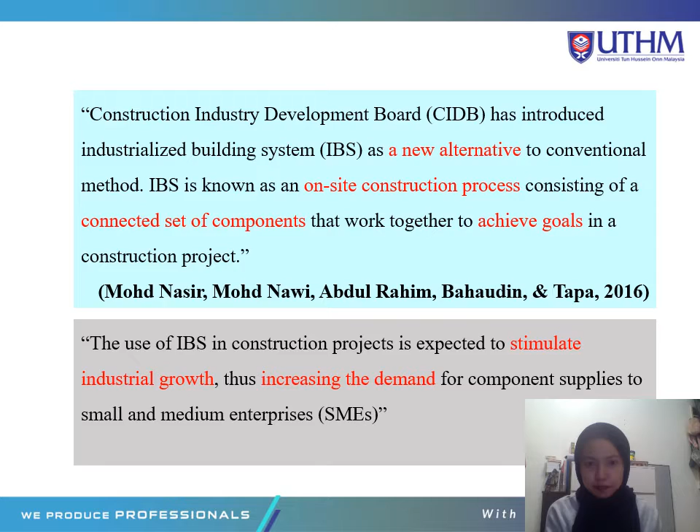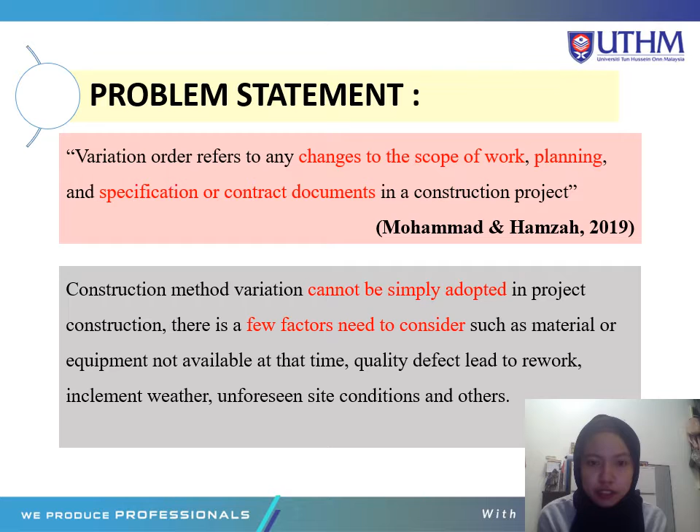For problem statement, variation order refers to any change to the scope of work, planning and specification or contract document in the construction project. Construction method variation cannot be simply adopted. In project construction, there are a few factors to consider, such as material or equipment not available at that time, quality defects leading to rework, inclement weather, unforeseen site conditions, and others. So we need a suitable strategy to avoid delay in project completion and increased project cost. Thus, it is essential to recognize a suitable strategy.

For the objectives of this project, the first one is to identify the implication of construction method variation in the construction phase on project scheduling. The second one is to propose a strategy for construction method variation from conventional to IBS. And the last one is to validate the proposed strategy by simulating the project scheduling using Primavera software.

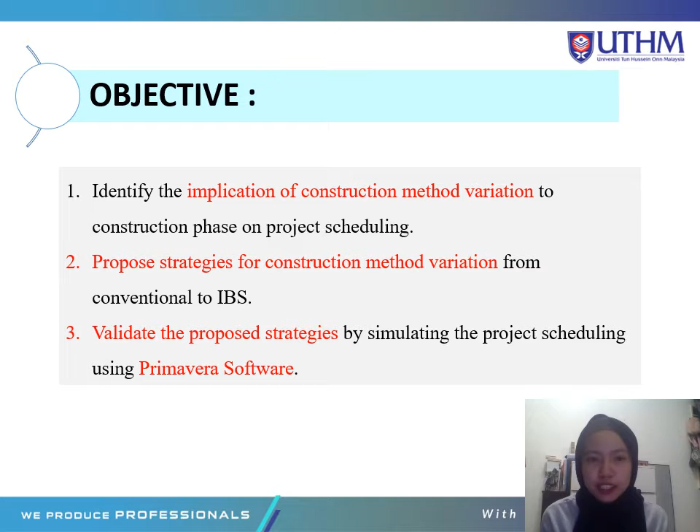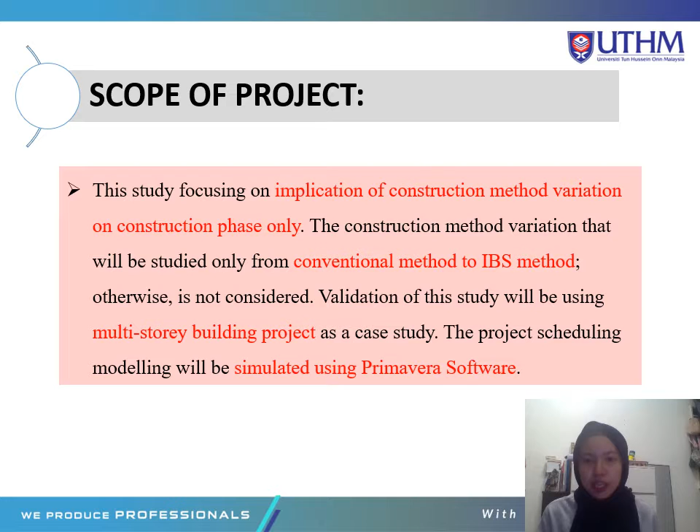The scope of this study is only focusing on the implication of construction method variation on the construction phase only. The construction method variation that will be studied is only from conventional method to IBS method. Otherwise is not considered. Validation of this study will be using a multi-story building project as a case study. The project scheduling modeling will be simulated using Primavera software.

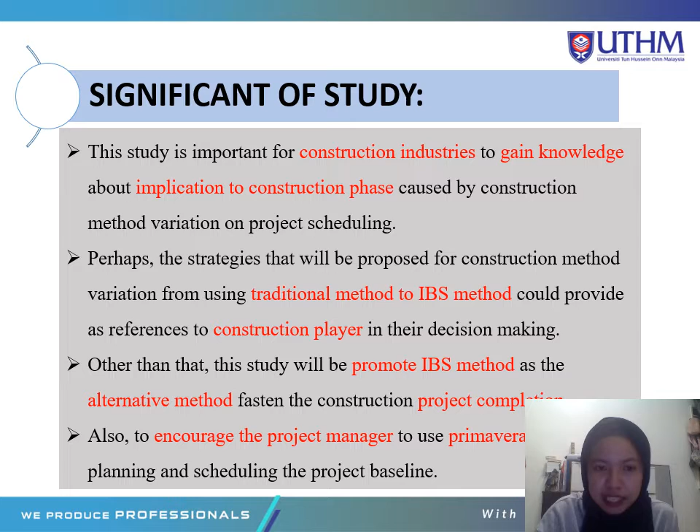This study is important for the construction industry to gain knowledge about the implication to the construction phase caused by construction method variation on project scheduling. Perhaps the strategy that will be proposed for construction method variation from traditional method to IBS method could serve as a reference to construction players in their decision making. Other than that, this study will promote IBS method as the alternative method to fasten construction project completion, and also encourage project managers to use Primavera software in planning and scheduling the project baseline.

For literature review, method of construction. Construction project means different things to different people. It can mean building a house, a high-rise building, a dam, an industrial plant, an airport, or even remodeling or upgrading a facility. There are many types of construction method for construction projects. Each method applies different types of main material and activities. It is also closely related to the amount of waste generated. Each method has its advantages and disadvantages, such as speed, duration of work, construction work, and cost.

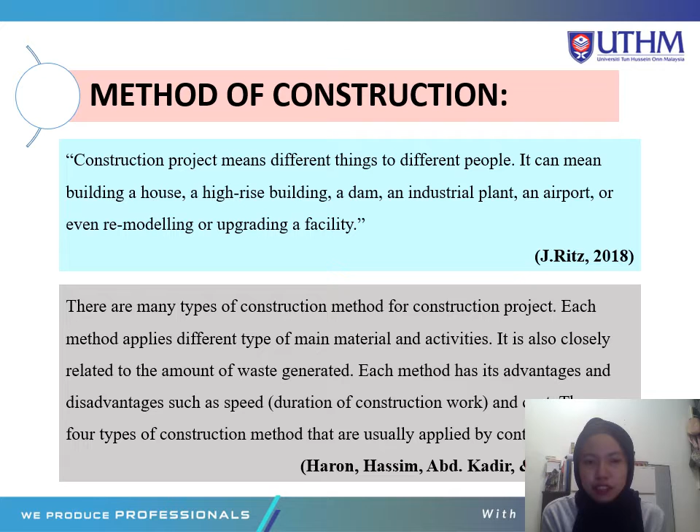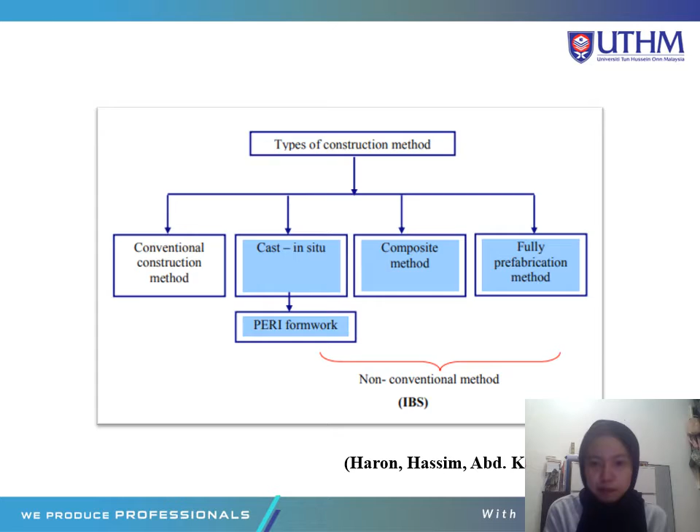There are types of construction method that are usually applied by contractors, such as conventional construction method, cast in situ composite method, and fully prefabricated method. Cast in situ composite method and fully prefabricated method are classified as non-conventional methods, and all types of IBS are categorized under one of these methods. Conventional method in construction projects is defined as a system of current practice, usually using in situ concreting with temporary wooden formwork.

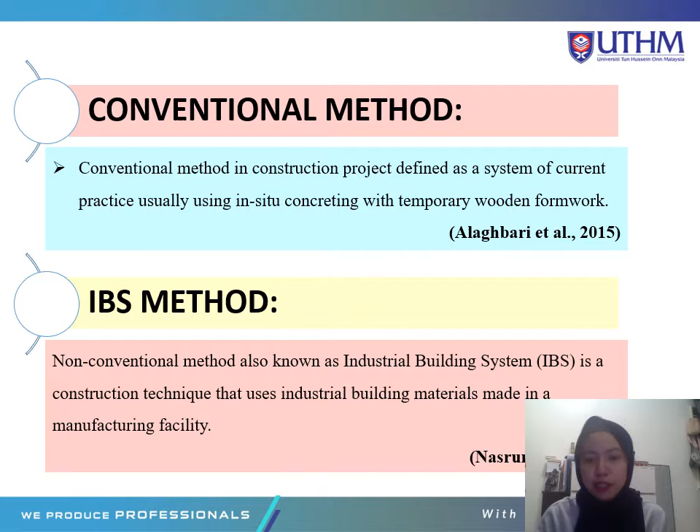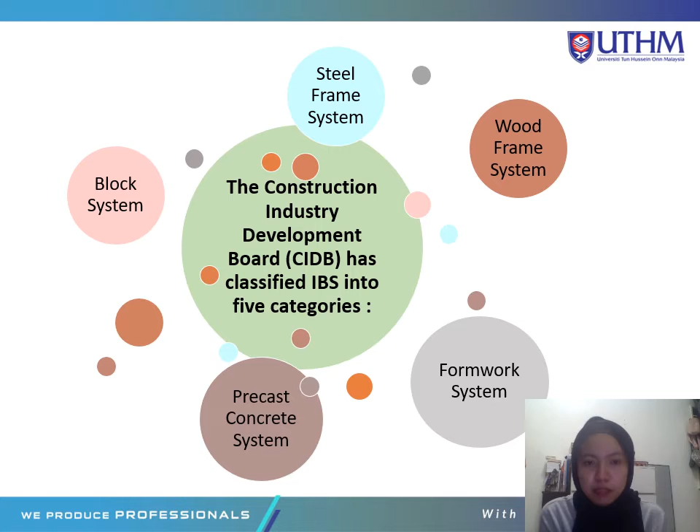Non-conventional method, also known as IBS, is a construction technique that uses industrial building materials made in manufacturing facilities. CIDB has listed 5 categories of IBS, which are steel frame system, wood frame system, formwork system, precast concrete system, and block system. Advantages of IBS are cost saving, social benefit, quality control of products, delivery time, safety, and cleanliness of work site.

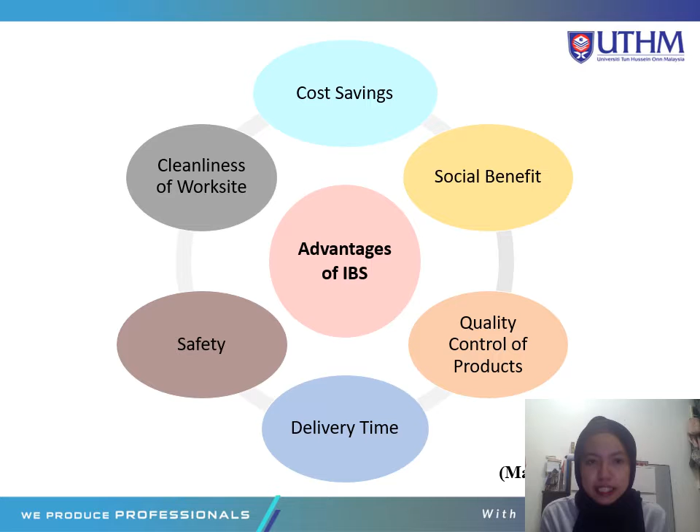Time overrun. Delay is a situation when the contractor, consultant, and client jointly or severally contributed to the non-completion of the project within the original, stipulated or agreed contract. This is a group of factors causing time overrun, which are transportation, contractor, consultant, owner, project, design, material, equipment, labor, and external factors.

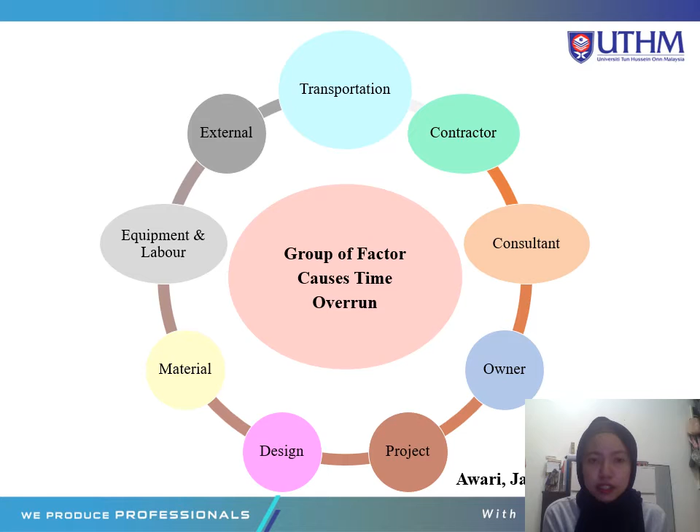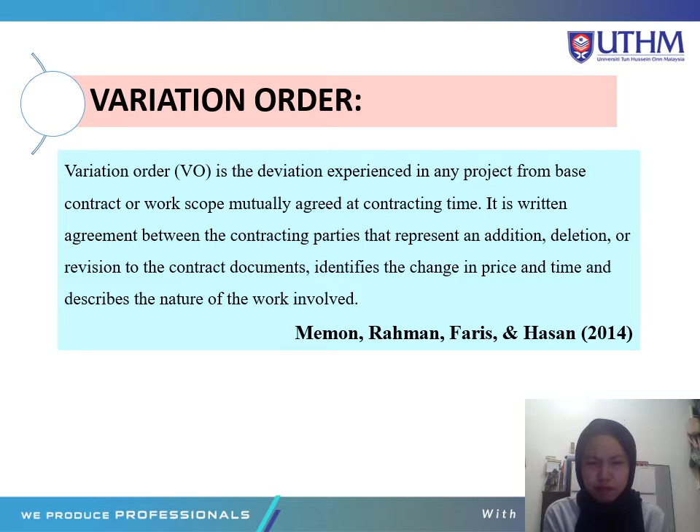Variation order. Variation order is the deviation experienced in any project from the base contract or work scope mutually agreed at contracting time. It is a written agreement between the contracting parties that represents an addition, deletion, or revision to the contract document. It identifies the change in price and time and describes the nature of the work involved. This is several causes of variation orders.

Causes of variation orders include: change of schedule, change in design by the consultant, unavailability of equipment, change in scope, conflict among contract documents, shortage of skilled manpower, lack of strategic planning, owner financial problem, design complexity, contractor financial difficulties, inadequate design, obstinate nature, inadequate working drawing details, poor workmanship, change in specification by the owner or consultant, poor procurement process, and impediment to prompt decision-making process.

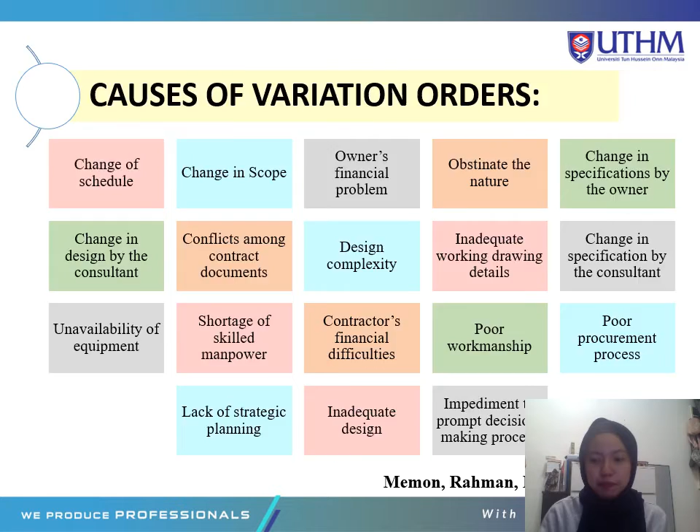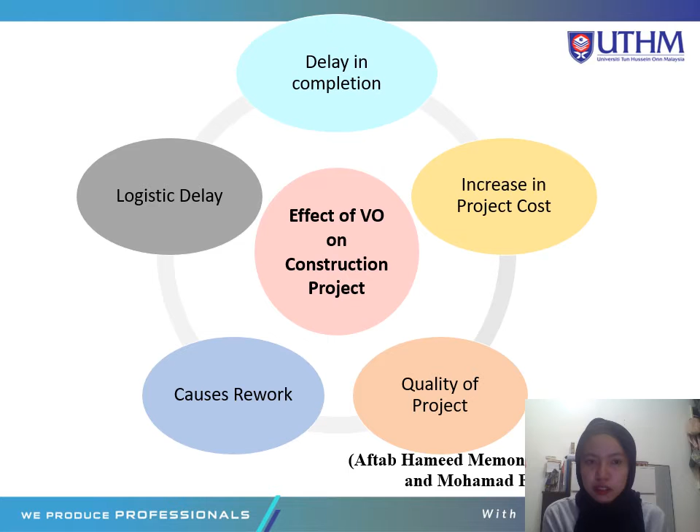This is the effect of variation order on construction projects, which leads to a delay in completion, increase in project costs, quality of project issues, causes rework, and logistic delay.

Before planning of the project, we have a clear objective, risk assessment, milestone, resource allocation, and task dependencies. Monitoring and control can be done for the timely completion of a construction project.

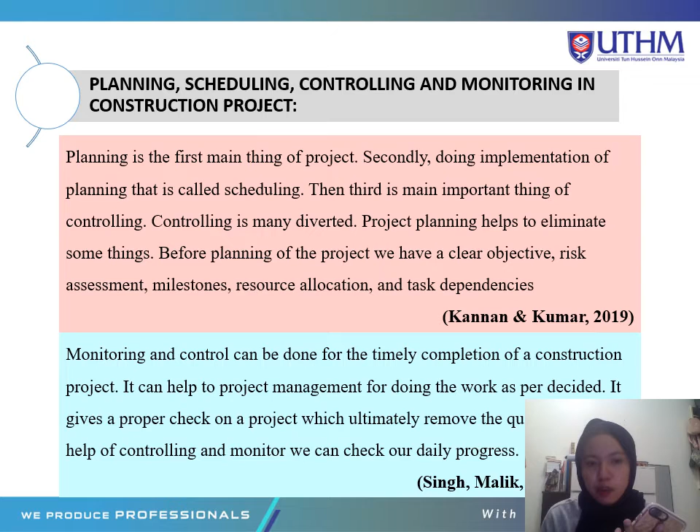It can help project management to do the work as per decided. It gives a proper check on a project which ultimately removes the queries. With the help of controlling and monitoring, we can check our daily progress.

Primavera software. Primavera software can function as a planning, scheduling, budget, and resource management software that enables organizations to make informed decisions and improve their ability to deliver project on time and under allocated budget.

It also helps to manage the IT process, determine the estimated completion of telecommunication projects, risk analysis in aerospace engineering, and enables precise control in the manufacturing process. As a result, the scope of Primavera is an ever-changing, ever-growing tool for simplifying the completion of all project-oriented tasks and activities.

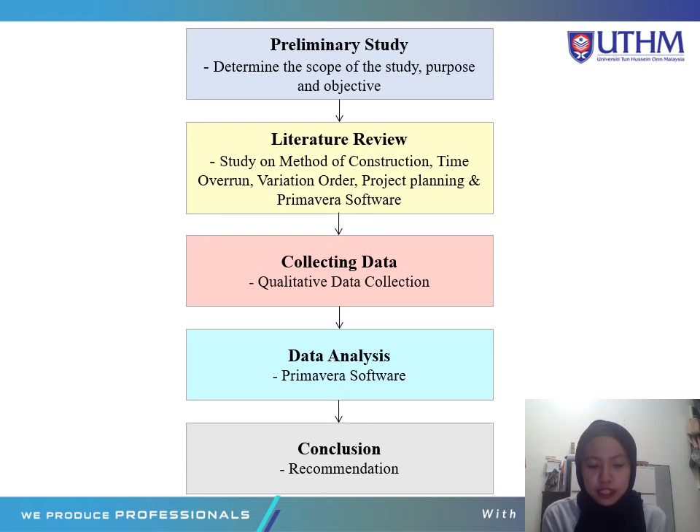Furthermore, the literature review and the research methodology are completed to facilitate the data collection. The stage concludes with the result of the analysis and conclusion of the study.

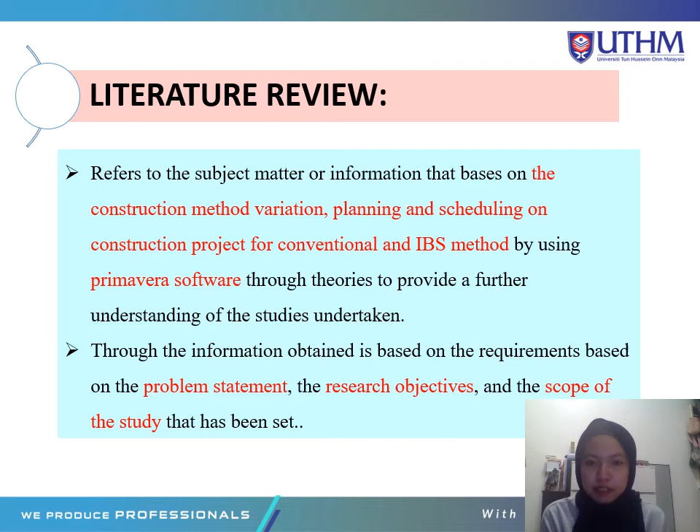Literature review refers to the subject matters or information that is based on the construction method variation, planning, and scheduling on construction projects for conventional and IBS methods by using Primavera software and theory, to provide further understanding of the studies undertaken. The information obtained is based on the requirement, the problem statement, the research objective, and the scope of the study that has been set.

Collecting data using literature review, interview, and case study. For literature review, I review past case studies to get some theoretical info, past review articles, and reports from the latest 10 years.

Interview up to 3 respondents from the construction industry, using email, internet interview, and mobile method as interview methods. For the case study, focusing on a multi-story residential project at Johor Bahru that uses the conventional method as the construction method.

Data analysis that I will use is grounded theory, narrative analysis, and Primavera software. For grounded theory, the information gotten from the literature review and case study will be analyzed according to the research objective on the selected article, analyzing the implication to construction phase caused by construction method variation on project scheduling.

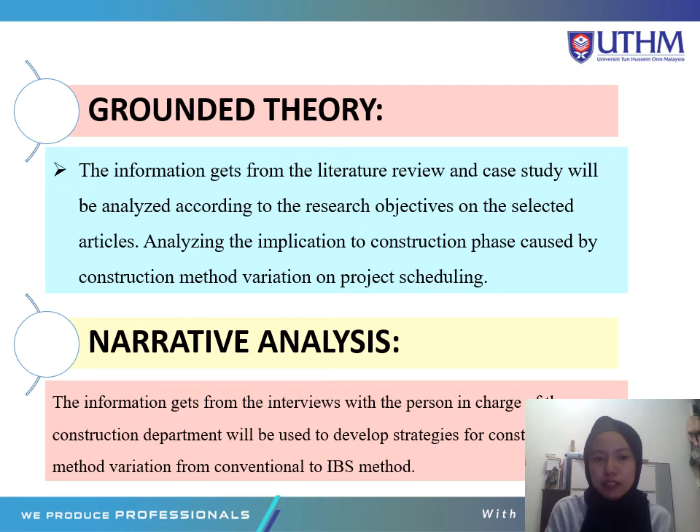The information obtained from the interview with the person in charge of the construction department will be used to develop a strategy for construction method variation from conventional to IBS method; that is for narrative analysis.

For objective 3, validate the proposed strategy by simulating the project scheduling using Primavera software. I will collect the data using case study and use Primavera software as the data analysis.

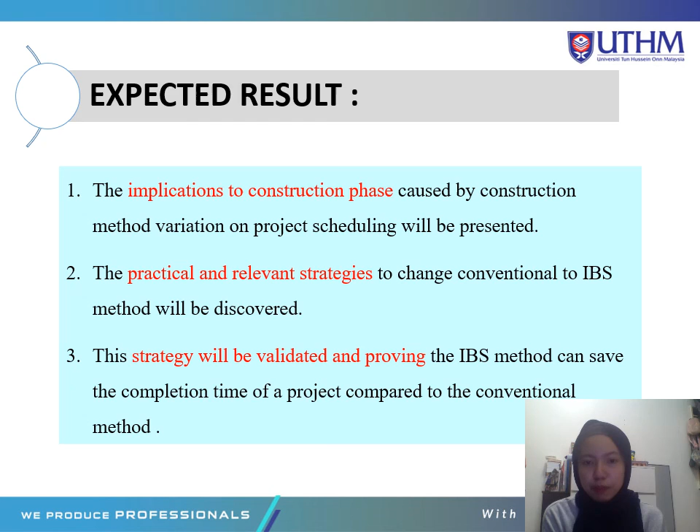For the expected result, I hope at the end of this study I will get the implication to construction phase caused by construction method variation on project scheduling presented. The practical and relevant strategy to change from conventional to IBS method will be discovered. This strategy will be validated, proving that the IBS method can save the completion time of a project compared to the conventional method.

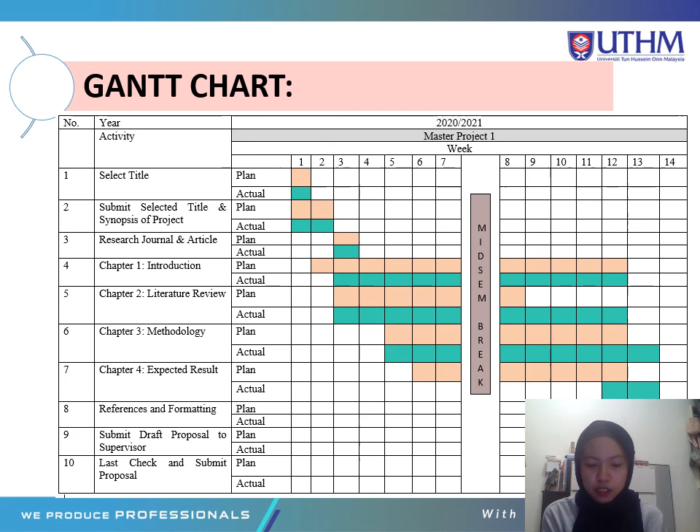Last but not least, this is my Gantt chart timeline to complete the proposal, and also the planning Gantt chart for master project 2.